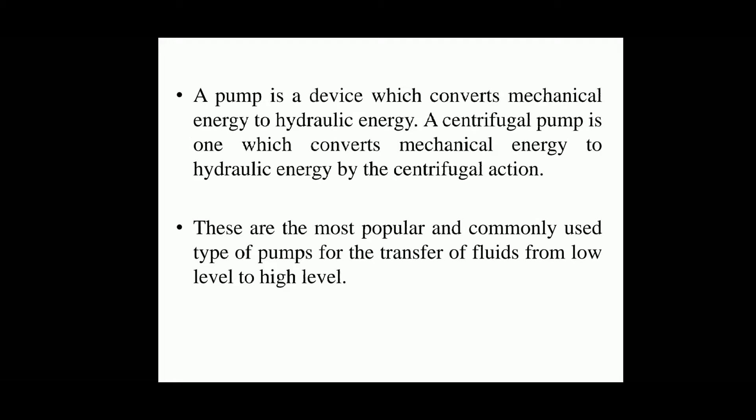The aim of the experiment is to determine the efficiency, specific speed, and also to draw the characteristic curves of the centrifugal pump under constant speed.

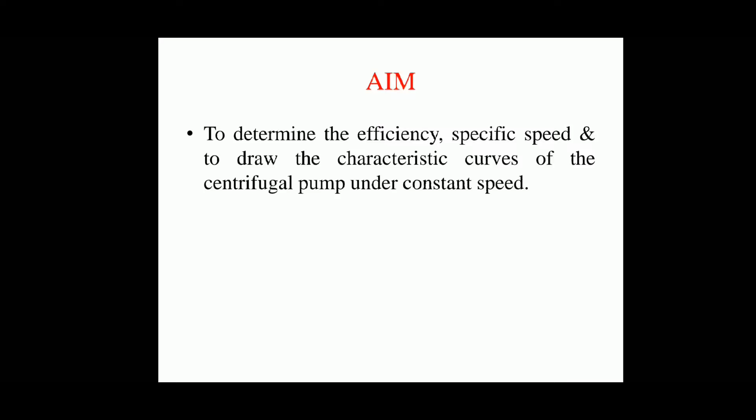The apparatus required to carry out the experiment is centrifugal pump, speedometer, pressure gauges, energy meter, measuring tank fitted with a piezometer, stopwatch, and supply of water.

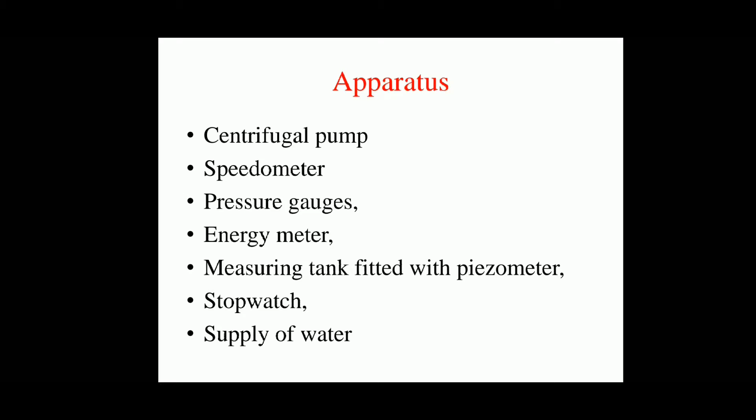The main parts of a centrifugal pump is impeller, casing, suction head, suction pipe, delivery head, and delivery pipe.

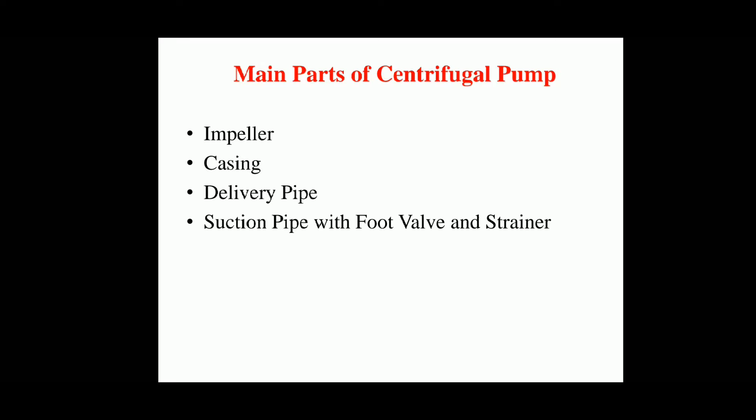In this figure, you can see various parts of a centrifugal pump. An impeller is a rotating part of the centrifugal pump which is provided with cups on the circumference of it. Suction pipe lifts the water from the lower level, and delivery pipe discharges the water to a higher level. You can see there is a suction head and delivery head which is provided.

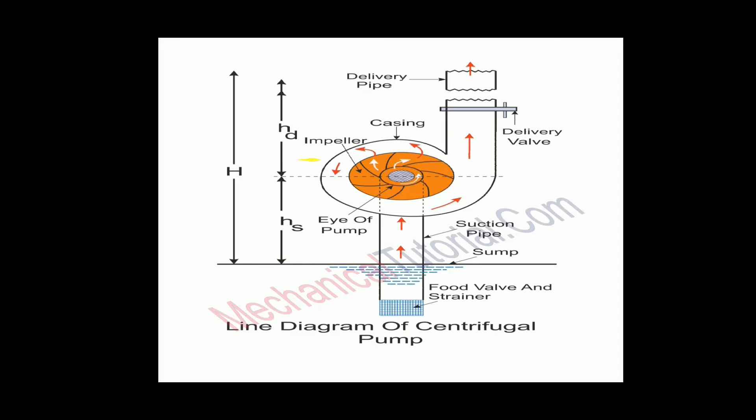So to begin with the experiment, first you need to note down certain values. First one is pump speed, expressed in terms of RPM, kept constant throughout the experiment. Second one is area of the measuring tank, taken in terms of meter square.

Next one is energy meter constant, which is 3200 revolutions per kilowatt hour. Last one is number of blinks in the energy meter, which is taken as a constant value.

Next, you have to note down the time required for n number of blinks for each trial in terms of seconds.

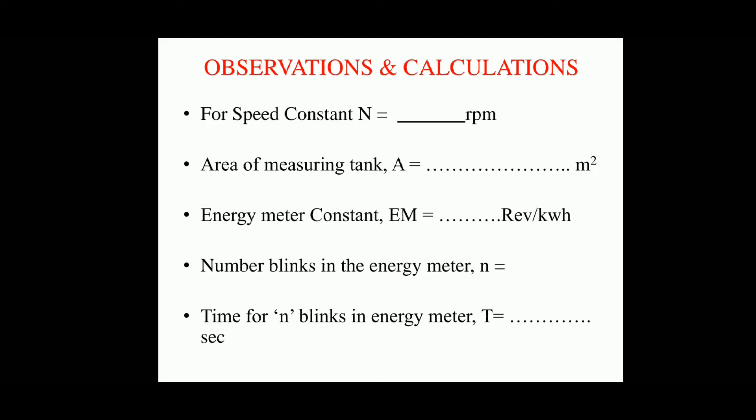Next, calculate power input value using this equation, where n is the number of blinks in the energy meter, Em is the energy meter constant, and T is the time required for n number of blinks in seconds. Express power input in terms of watts.

Delivery pressure value is obtained from the instrument, and it is converted to delivery head by multiplying it with the value 10. Suction pressure value is also obtained from the instrument, and it is converted to suction head by multiplying it with 13.6 divided by 1000, expressed in terms of meter of water.

The summation of suction head and delivery head gives you the manometric head.

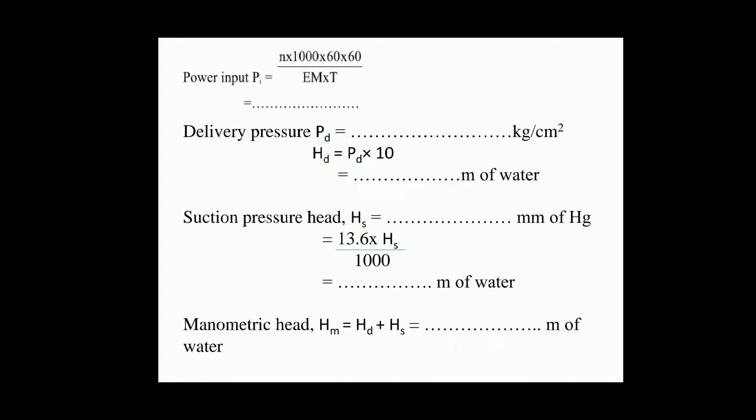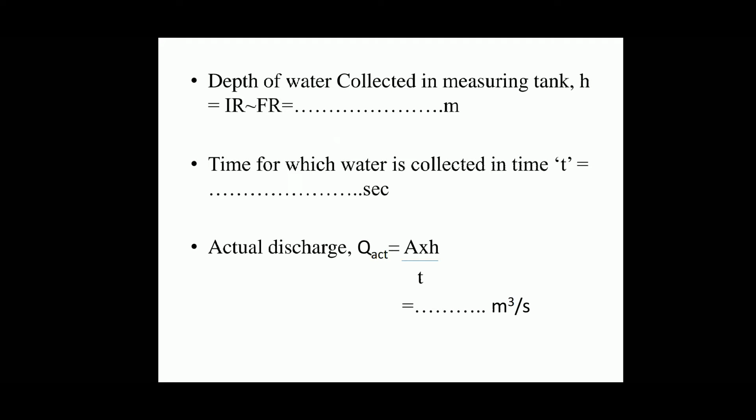Next, you have to note down the measuring tank reading. Using that, you can calculate Q actual, given by A into H by T, expressed in terms of meter cube per second.

Next, calculate the power output using the equation W into Q actual into HM, where W is the specific weight of water.

Next, calculate the efficiency of the pump using the equation power output by power input multiplied by 100. You will obtain the value in terms of percentage.

Lastly, calculate the specific speed of the centrifugal pump using the equation N into root Q actual divided by Hm to the power of 3 by 4, and express the value in terms of RPM.

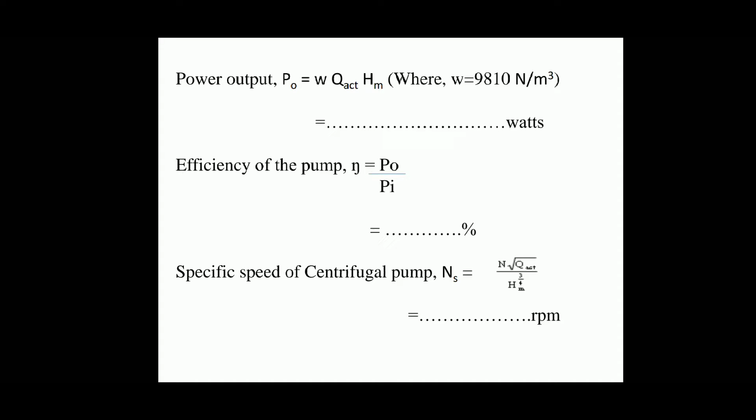For the next trial, vary the delivery pressure and note down the value of suction pressure, number of blinks in the energy meter, and the measuring tank reading, and enter the values in the tabular column as shown.

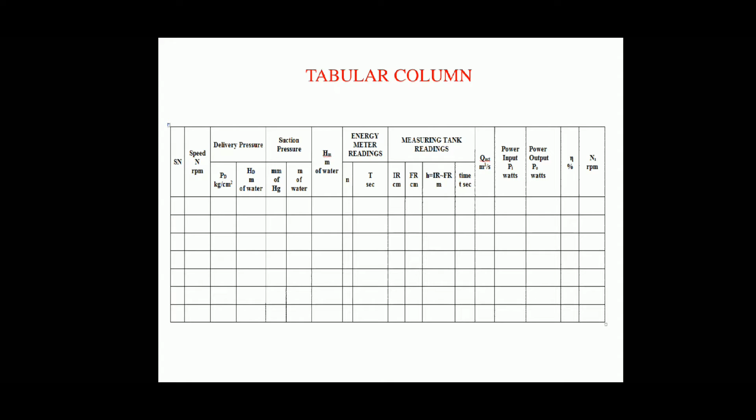This is the instrumental setup of the centrifugal pump. In the front, you can see different readings which you will be taking in the experiment.

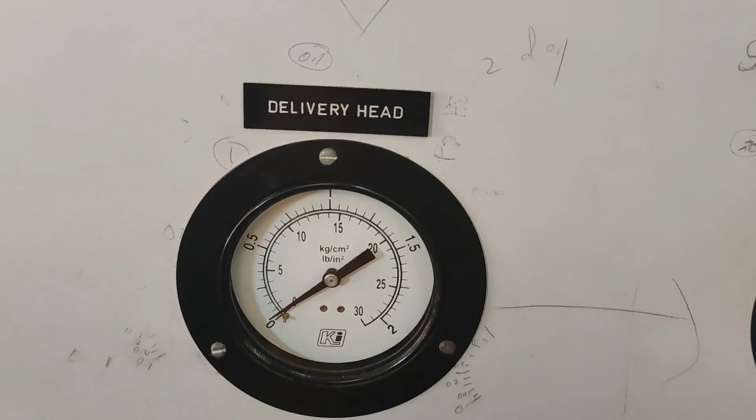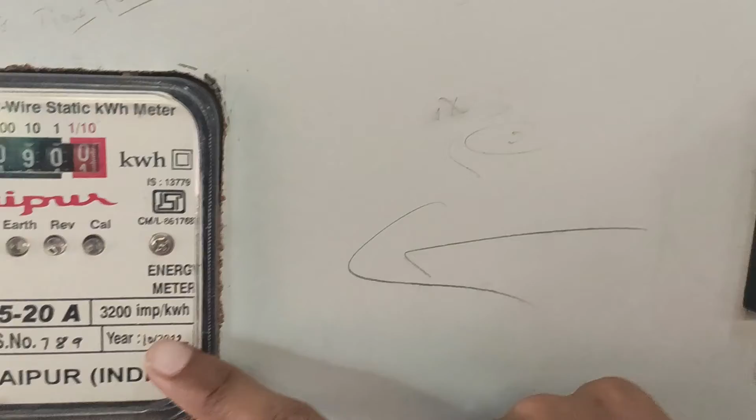This is the pump speed, this is the suction head, this is the delivery head, and this is the standard reading, which is nothing but the energy meter constant, which you have to enter at the starting of the experiment, which is 3200 revolutions per kilowatt hour.

This is the back side of the instrument. Here you can see an outer casing. This is nothing but the centrifugal pump.

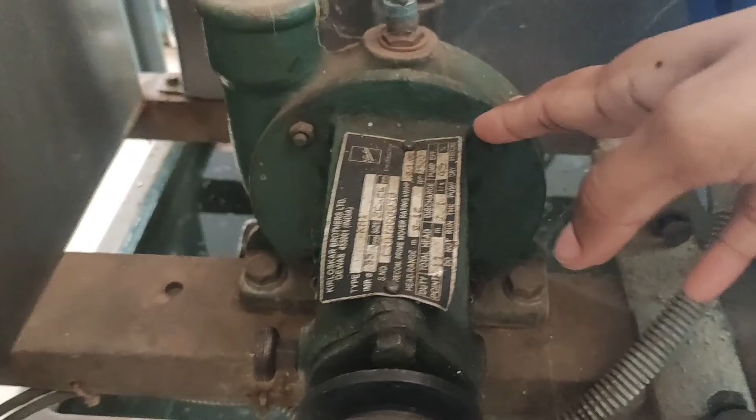If you take this casing, inside the casing the impeller will be provided, which is the rotating part of the centrifugal pump. This centrifugal pump will be connected to an electric motor.

The water which enters inside the impeller starts rotating due to the centrifugal force, and it will be discharged into the measuring tank.

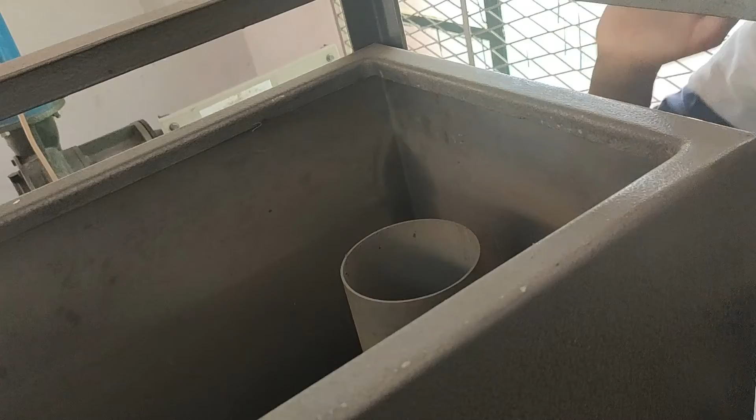Next we have to switch on the pump, and then take the pump speed, which we have to take in terms of RPM.

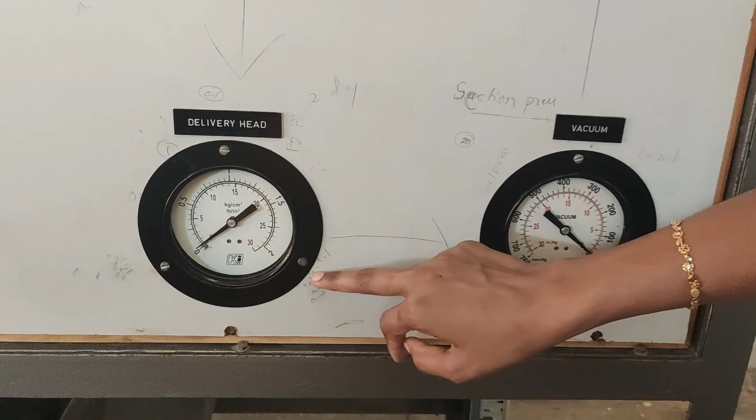Next we have to increase the delivery head. Here we can see we have to take the outer reading. The readings are in terms of 0.5, 1, 1.5 and 2.

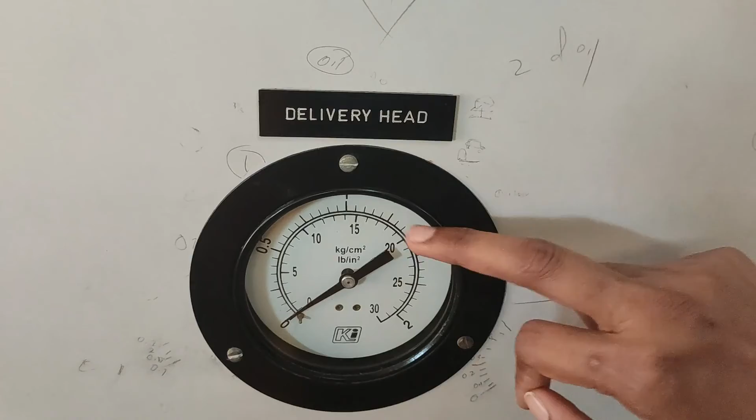We can start by taking the reading for the first trial as 0.25. Next we can increase the delivery head for 0.5, 0.75 and 1. For every increase in the delivery head, we have to take the suction head reading.

The unit here is in terms of millimeter of mercury, and we have to convert this to meter of water.

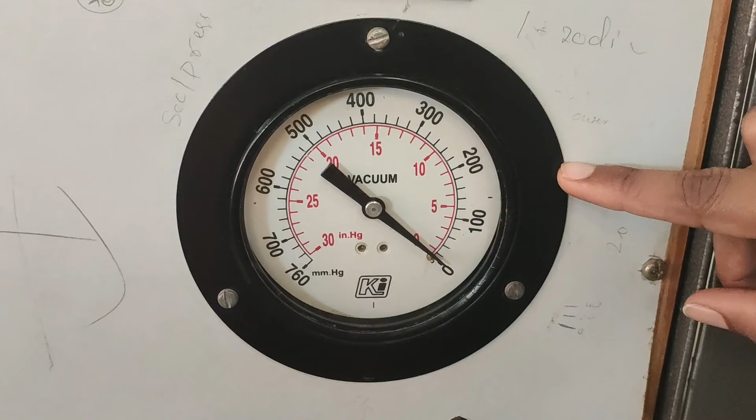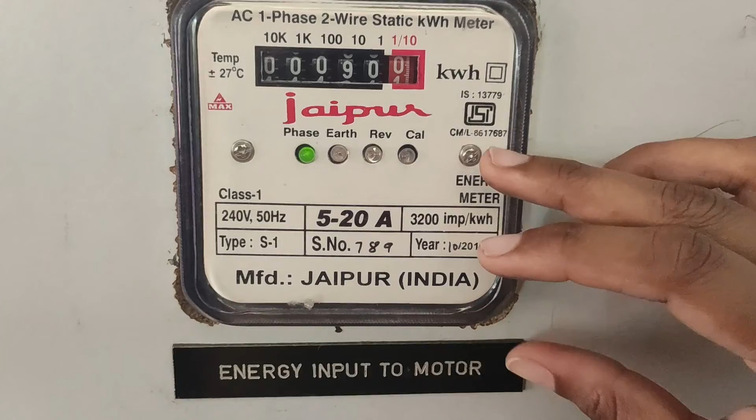After we have taken this, we have to take the number of blinks. Here you can see there is a blink. For the standard number of blinks, you have to note down the time which is required.

Using the stopwatch, you have to note down the time which is required. We have to take down the amount of water which has been collected in the measuring tank.

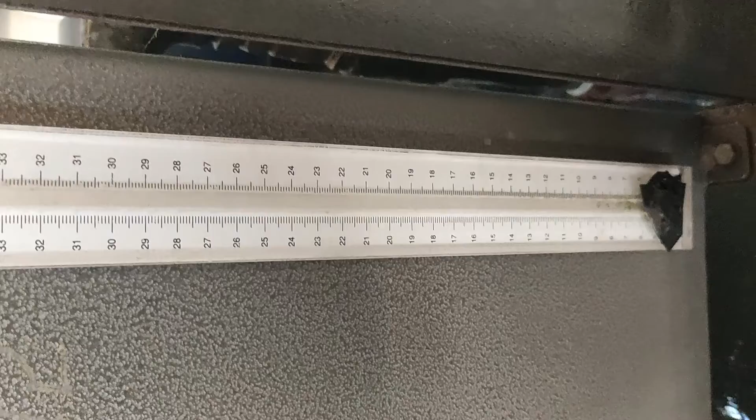Using that we have to calculate Q actual, which is A into H by T. Here you can take the initial reading, final reading, and for the initial and final you have to take down the amount of time required.

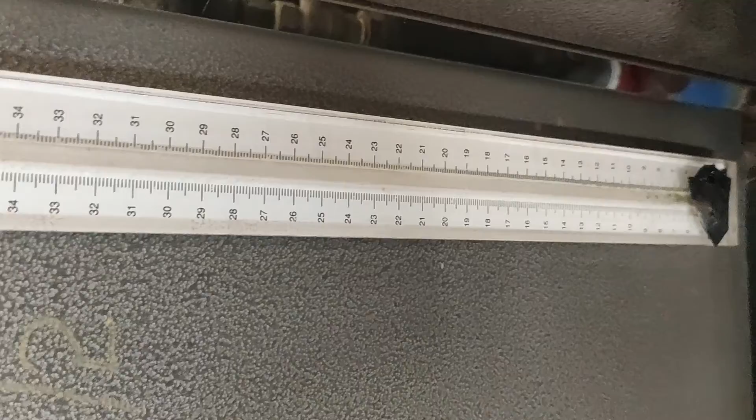Using that we can calculate Q actual.

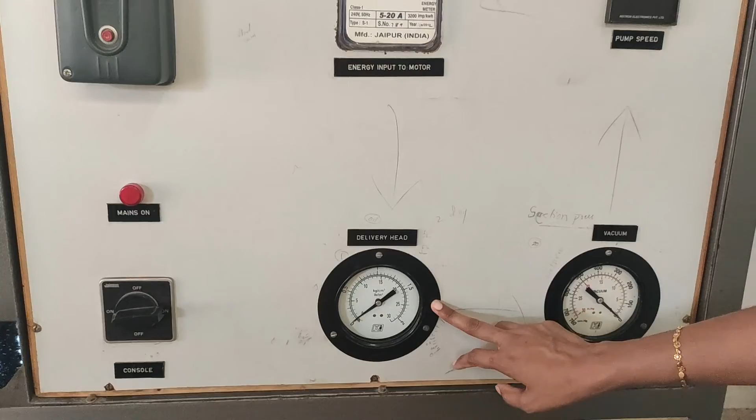You have to carry out this experiment for 5 trials by increasing the delivery head and taking the suction head, number of blinks, the time required for standard number of blinks, and Q actual. After taking all these readings, you have to enter them in a standard tabular column.

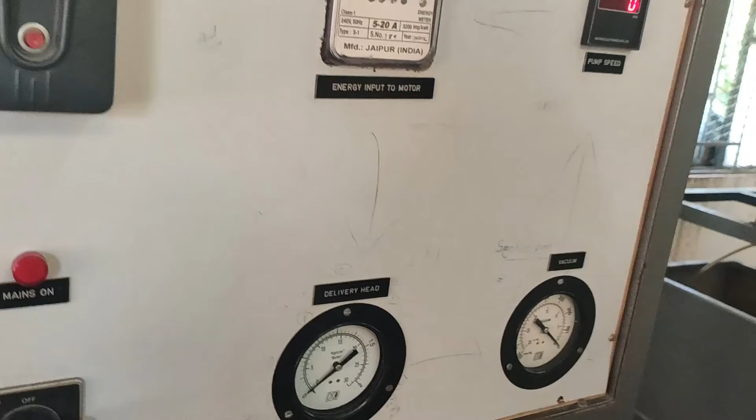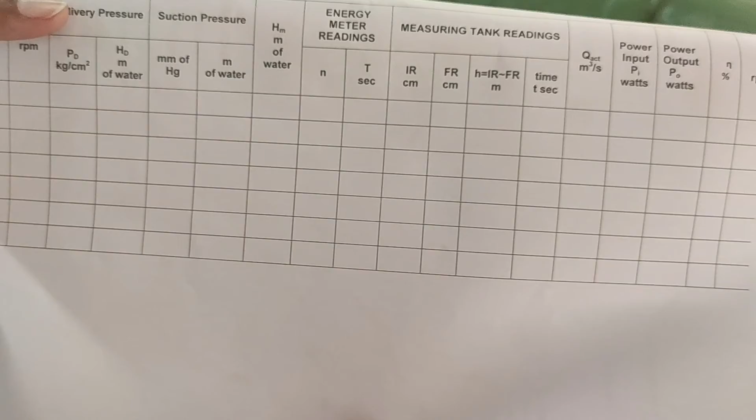In this standard tabular column, you can see there is speed in terms of RPM, delivery pressure, which you have to convert to meter of water, and suction pressure, which also has to be converted to meter of water.